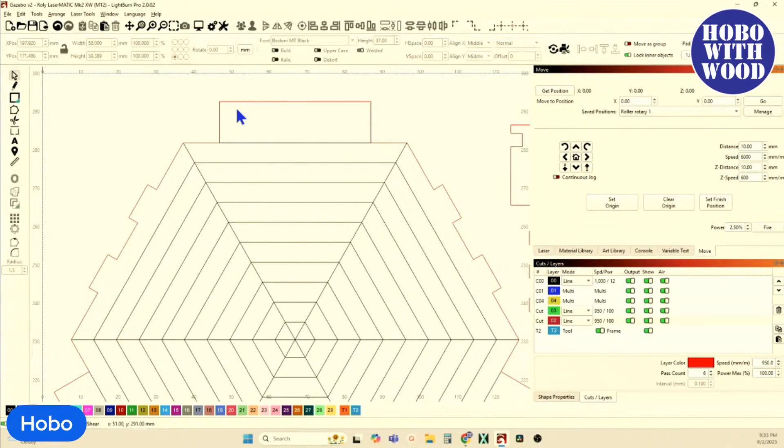So here is the floor, and the original design was come around here, and it had the same tabs on it that popped out right here. And that's what you see at the top of the stairs right now, these tabs. Well, these tabs, I removed them and just extended the floor on out, and that will actually be the top step on the staircase. And I modified the stairs so that now I've still got 3 treads here, but there's only going to be 2 — one that snaps in here and one that snaps in here. And this will be the first step up.

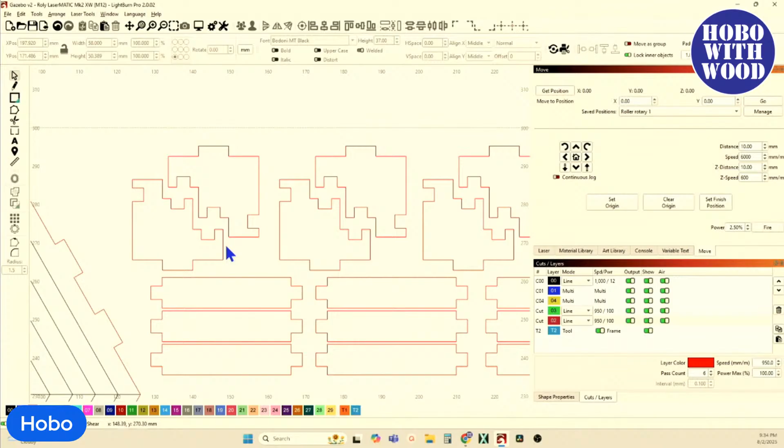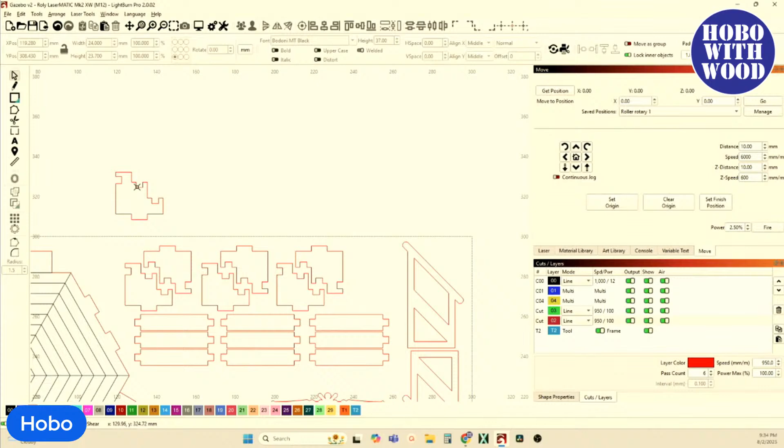In fact, let's pull this out so you can see it a little bit better. That'll be the first step up here, second step up here. And then this is where the floor of the gazebo comes out. And this one is where that third tread will go back here, and it'll be behind and underneath the floor.

And the sole reason for this piece is to help you square everything up. When you pop these 2 treads in and you pop this one in, then you're going to start to have everything squared up. Without this on the back, even when I had the 3 here and here, the whole thing could still get cattywampus. You couldn't square it up. And when you were trying to manage that one piece and get it lined up, get it into the tabs on the bottom and into the slots on the gazebo...

I mean, I did it because there it is. Anybody who's got the first file and tries to do it might say, oh man, I can't do this. It can be a little bit challenging, but it's doable. And I did it. It works, or else I wouldn't have put it on the website.

But by me doing it this new way, you can actually build the steps, and there will be a complete separate module that will be squared up. And then whenever you've got them squared up, this back tread right here, you can put a little bit of glue on the back of it and then put your glue on here. These will just snap straight down and push that against the base of the gazebo.

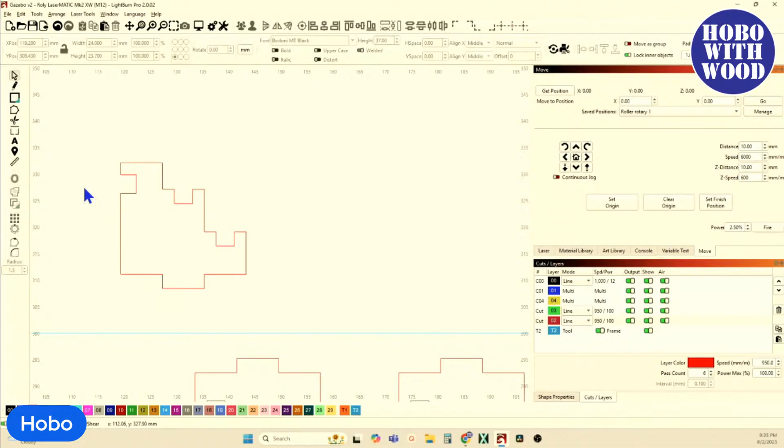And there's no holding your mouth right and dancing and hopping around and spitting in the wind on a blue moon to get these things lined up right, because that's what I had to do. It was challenging, but I got it. But that will clean all of this up, make these easier to assemble and install.

And I think that's going to make a huge improvement. Kathy says, I am thinking this would be neat for a wedding table. Ooh, for the bride and groom statues inside. Now, I could see that would work.

And you could even customize it, personalize it, monogram it instead of just having a clock up there. It could be the wedding day, the initial, maybe every other one is the last initial, and then every other one is the anniversary date, the wedding day — that way it'd be something special, but not everybody's going to like that. There'll be a handful of people that will love it, and then there'll be some that'll be like, yeah, that's just too country for me, honey. They'd be too sophisticated. But I like it.

So there are two 300 by 300 tool paths, and I've got everything nested on two sheets.

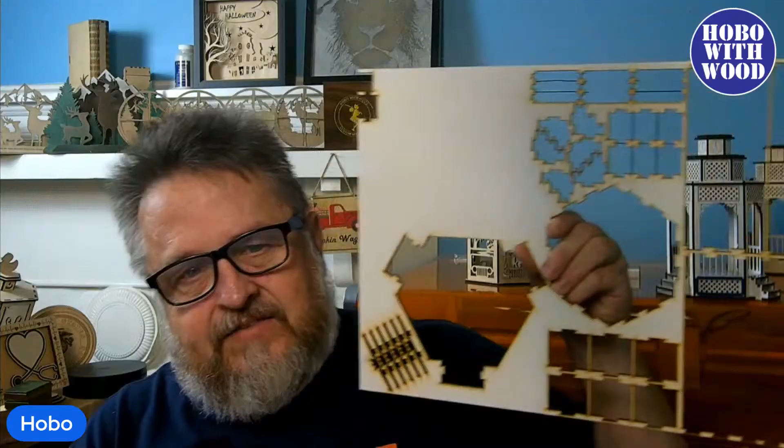Now if you were going to do it like I did - I used the 3 mil MDF, and it's 12 by 19, give or take. And there's the waste from it. Then I had, I don't know where the blue's at, but another 12 by 19 that I did the roof line with. It's here somewhere, don't know. So you can do it from a single sheet of 12 by 19.

And then if you want to do the colored roof, a partial sheet of that. But if you didn't want to use MDF and you wanted to use 300 millimeter material, you can do it on two sheets of 300 by 300.

Brad says, what is your assembly time? I know mine will be much higher than most anyway. The assembly time, or the cutting and assembly time?

I spent more time cleaning - and I say this cleaned up, you can see the black or the soot around right there, see how dark and sooty that is? But it wipes right off, and it's clean as can be. I spent more time cleaning the material as part of the assembly process - more time cleaning than I did actually gluing stuff together. And I did not get upset about that because it was just wiping it off.

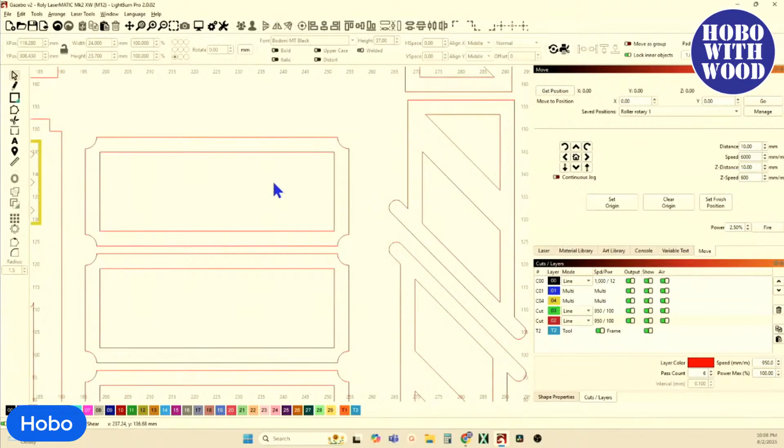Will you have room for two sheets after you add the accents? I've got the accents, everything's on there on two sheets. This is everything—it's got the roof accents right there, the accents for the bottom around the base, and the handrails. Everything is on here on 2 sheets of 300 by 300. So for less than $6 in material, you can put this together. But I started with the actual base and put 3 of the 6 sides on there.

Why don't you cut out the small pieces to save on the wood? I don't follow you there. Are you saying why don't I use scraps, some of my scrap material, to cut out the small pieces? You could, if that's what you're talking about. From a time savings standpoint, he's talking about the skeletons—the scraps. That's what I thought. So yeah, you could definitely use your skeletons.

Because I've got skeletons laying everywhere that I could easily cut out some of the trim pieces from. And over beside my laser, I keep really nice skeletons that have got some really good meat on them. In fact, this is a skeleton—you can see this is a skeleton from cutting out the first prototype that didn't work. But there is some really good meat on my skeleton that I could use to cut out the small pieces.

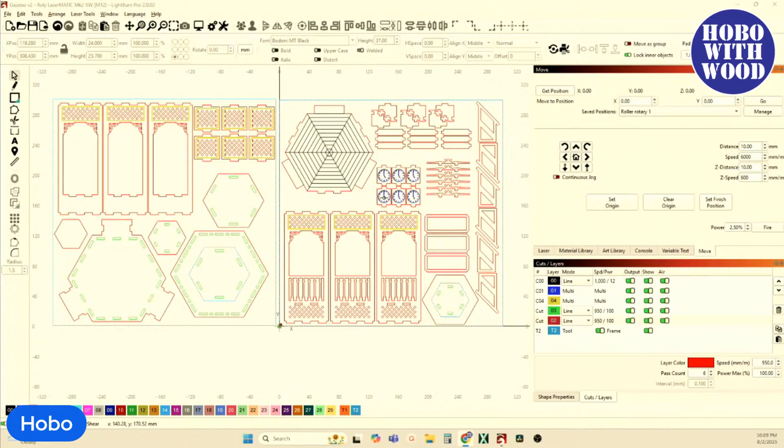The only problem with doing it that way, and it's not really a problem, is that the reason I have it nested on 2 pieces of 300 by 300 material is because when people buy my file—or even if they don't buy it and they're a patron who downloads it—having it nested very neatly on just 2 or 3 solid sheets of material, they prefer to see that. If you want to do your own and grab these off and put them on scrap pieces, you could do that. The one thing I'll caution you about is how many different variables in thickness you'll have cutting them out of 3, 4, or 5 pieces of scrap material versus putting down 2 sheets.

The door opening cutouts—yes, some of the small pieces could go there too. You're absolutely right. I think he's talking about using the small cutout spaces, yes. But I didn't need it. If I needed more room, you're absolutely right, that would work.

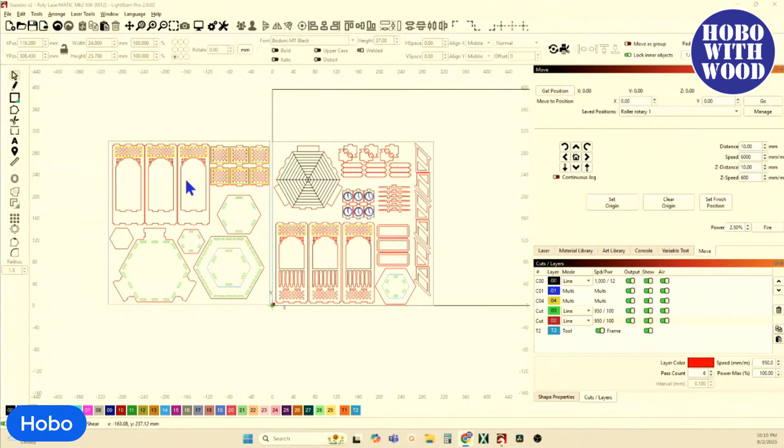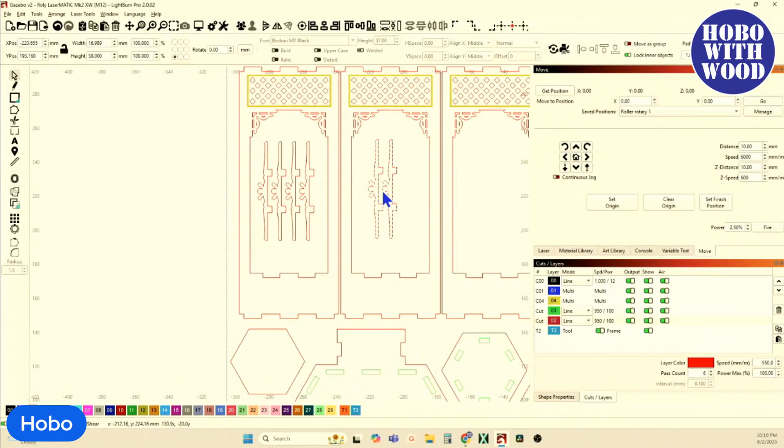I finally got it all put together, and Terry got it too. Right here is waste, this is waste, and this is waste. So if I needed the room, if this was too crowded, I could grab—I don't know if I get 3 of them, or they're grouped—let's just say duplicate that, bring it over here, rotate it, ungroup them. And since that's waste material, I could put them right there. And the stairs I could put in there. You absolutely could, there's nothing wrong with doing that. That would also keep you using the same thickness of material, so you won't have a problem with variances on slots and tabs. But I didn't need to—everything fit on 2 or 3 sheets without having to put pieces within pieces. Still, nothing wrong with doing that. Very smart to do that.

All right, I forget what we were talking about. That was another thing I was really pleasantly surprised by—the premium Baltic birch that I use a lot of, and will continue to. It varies in size anywhere from 2.7, sometimes 2.6 millimeters, up to 3.3 millimeters, so you can have a pretty wide variation in material thickness. But that craft closet stuff was 3 millimeter, period. The blue is 3 millimeter, period, flat as you could ask for. Man, I was really impressed with it.

I was talking about the assembly process. I started with the base. I put 3 vertical sides up, and then I pushed the floor into the 3 sides that I had in the base.

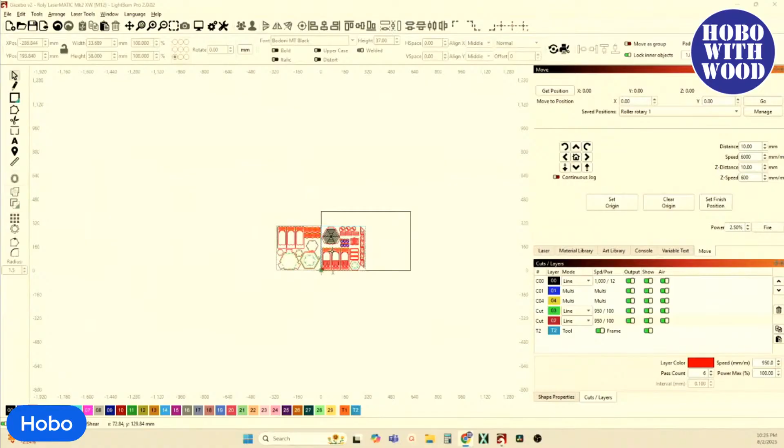And what he's talking about, if anybody's not aware of it - if I come over here, let's grab one of these that's individual, that's individual, that's okay, we'll just duplicate it and bring that over here, and we'll ungroup it so you can see, make sure those are grouped.

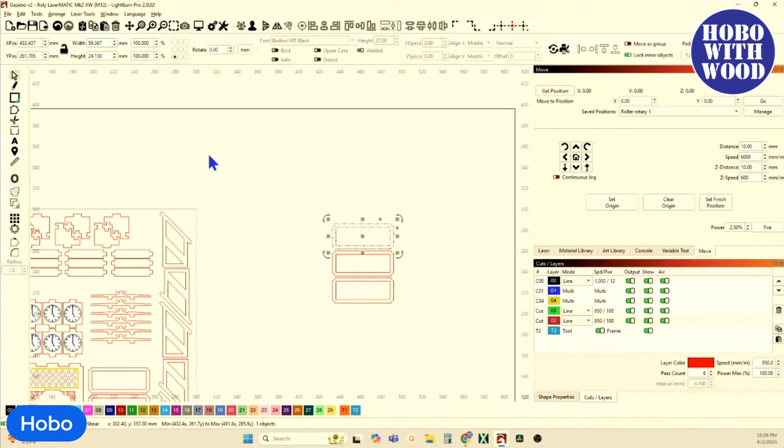So right now I'm zooming in and out with my center scroll wheel. But if I come up here and just put it right there, I've clicked on my width, and now if I scroll... well, there, it's not doing it. But if you are there...

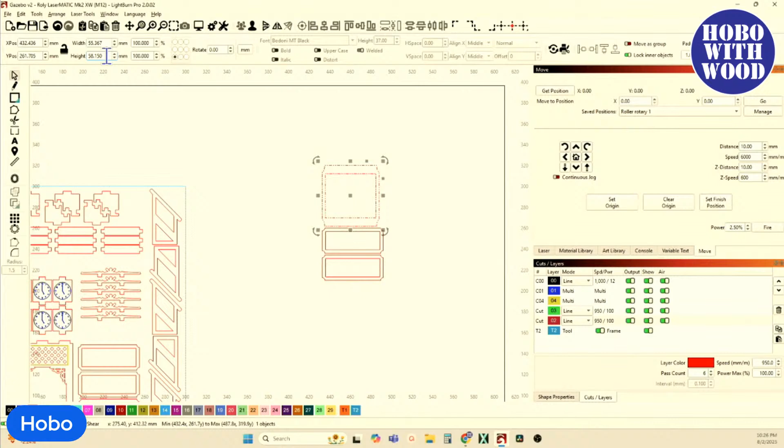There, it's not doing it. But if you're hovering over it, there we go. And you scroll, you can change your width by scrolling in and out. I've actually had it, and they may have fixed it so that you have to be hovering over it for the scroll wheel to work, because I've had occasion where I'd be scrolling in and out and the size would change. So that might be an amendment they made.

What do you know about that, Terry? Or not Terry, Chris, if you're still here? I've occasionally used the scroll button and inadvertently changed the size of a shape, but I never noticed I had to be in the field when I did it. Yep, Control Shift, Control Alt Shift, really tiny movements. Oh my goodness.

Scrolling was fixed due to the amount of accidental resizing. So yeah, they did change that, because I used to scroll all the time and it would go crazy. I don't know if that's exactly what you were talking about, Jim, that it works differently now, but that was a good fix, a good change.

Well, God bless you, sir. Thank you, Jim. All right, I got a little more work to do. It's been 90 minutes. Alright, Kilroy, you're asking — okay, Kilroy's asking, I didn't realize you were talking to me. Can you use... and there we go, that's why I didn't see it. That's a question. Kilroy, remember, anytime you've got questions addressing me, put question marks in front of it. I'm not selling, that's a whole other ball of wax, I'll talk to you about that in a second. I didn't realize that was a question.

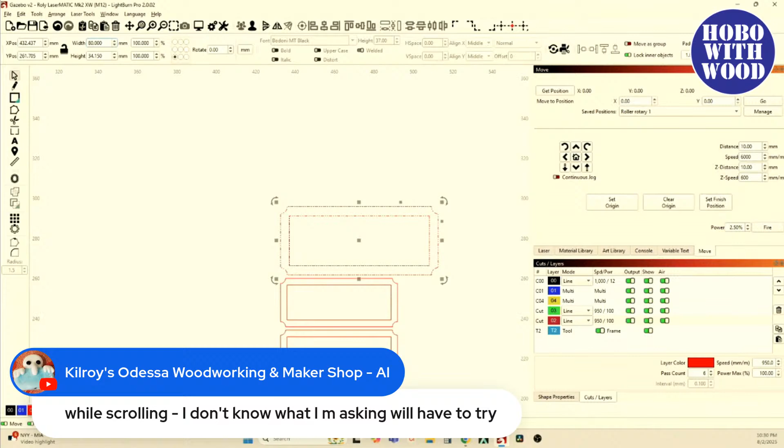And if I'm hovering over that and using just my scroll button — let me turn off your comment so we don't... where is it at? Kilroy, while scrolling — oh there it is, all right, turn it off. So I'm at 80 mil, hovering over that field, and I use the scroll button. I scroll up, it goes to 81, 82, 83. It's moving in 1 millimeter increments.

If I hold Shift, it's still 1 millimeter increments — Shift doesn't do anything. I'm now back to 80. Now I hit Control and the scroll button, it moves in 10 millimeter increments. Now I'm at 40. If I hit Alt, it doesn't do anything — Alt stops it from scrolling at all. Control Shift still does 10. Alt Shift doesn't do anything. Control Alt Shift doesn't do anything. So the only buttons doing anything are just Control, which makes it 10 millimeters, and Shift does nothing.

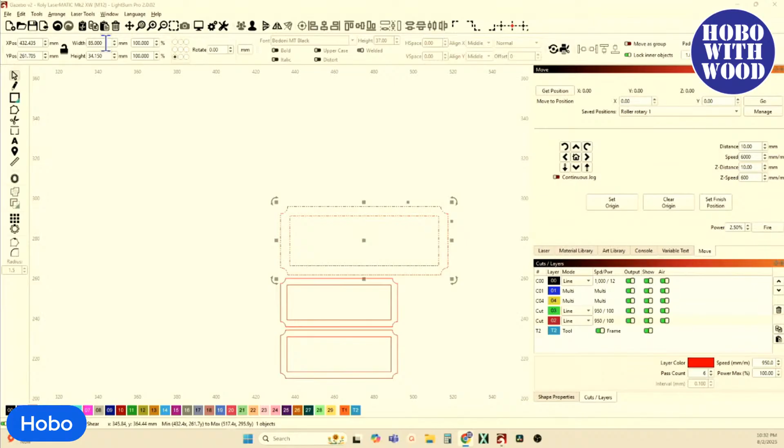And really, so Shift doesn't do anything either. So scrolling doing nothing gives you 1 millimeter increments, holding Control gives you 10 millimeters. And I just broke it. So that's what you were thinking about.

Roy's asking, am I still selling anything to John? He went through a little bit of an issue — he shared it, and it's not my place to share it, but he went through some problems with his online store after his wife passed away. Things got really rough, so I haven't done anything with him in a while. I think he's got most of that straightened out, but it was a mess. His wife passed away, and there was a lot of drama that went along with that. I think he's got a lot of that straightened out, but I haven't done any business with him lately. He's doing a lot of traveling — he's doing what I wish I was doing. He's living a hobo lifestyle right now. I think he's in Tennessee right now, but he's somewhere new practically every week — concerts here, appearances there. So he's living the life I wished I was living. Hence the name Hobo.

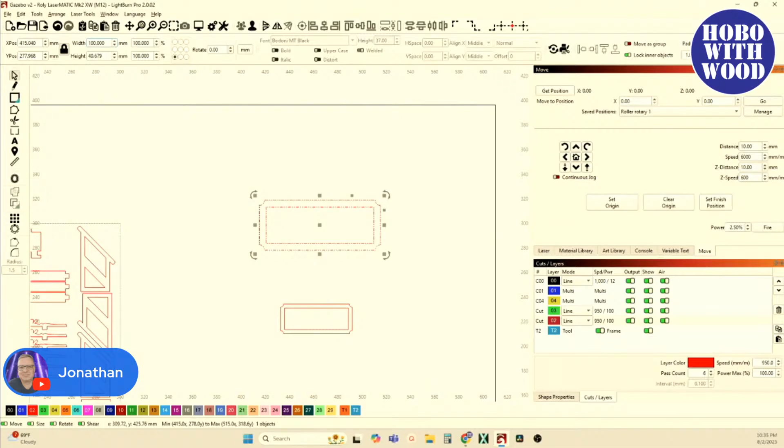John says he noticed that the scrolling trick bypasses the lock. So the lock is on, and when I scroll there, it's moving correctly. It's still locked. If I hold Shift, it's still locked. If I hold Control, it's still locked. I don't quite follow what you noticed there, Jonathan. Give me some more information, share with us what you figured out.

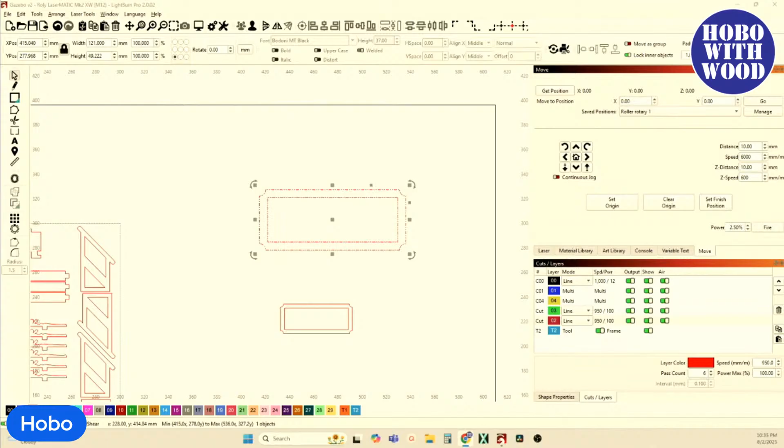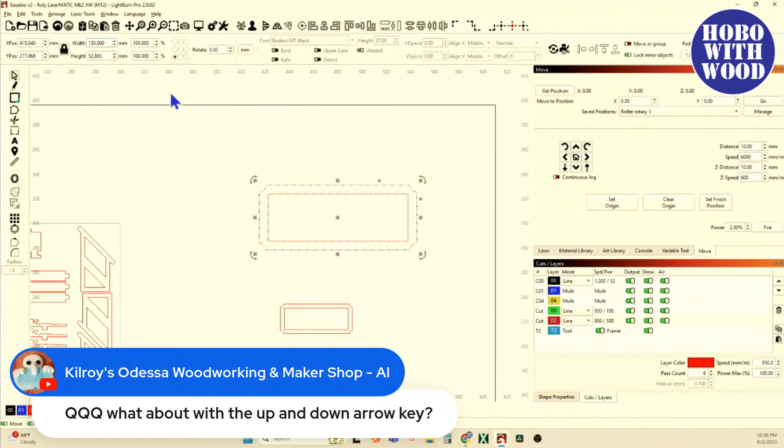What about the up and down arrow key? Up is 1 millimeter, Control is 10 millimeter. Looky there. So if you are, I'm back to 130 and I'm using my up and down arrow keys. Up 1 millimeter, down 1 millimeter, hold the control button, up 10 millimeters. So yeah, control will move your decimal point over apparently when you're moving your width and height. Windows is stealing priority on some, but not all keys.

Russ said he emailed me information on the MDF. Okay, good. I am an MDF fan, I found that there are different kinds. Must be due to the amount of glue and binder, that was my contention, Jim. The high density MDF is hard to cut, chars like wildfire, terrible. Lower density doesn't warp and it cuts well.

So yeah, I had no idea there were variables in MDF like that. That's why I mentioned the stuff you get in big box stores, it's probably that higher density stuff, full of lots and lots of glue, super hard to cut, I just didn't like it. But this stuff cut like butter, super impressive, nice clean cuts, full drops, really good stuff. So I apologize to everyone I ever offended by saying I don't use MDF. I prefer to use solid woods and hardwoods, the premium Baltic birch is okay, but I prefer hardwoods. Yeah, the MDF is good if you got good stuff, and I really am impressed with this stuff.

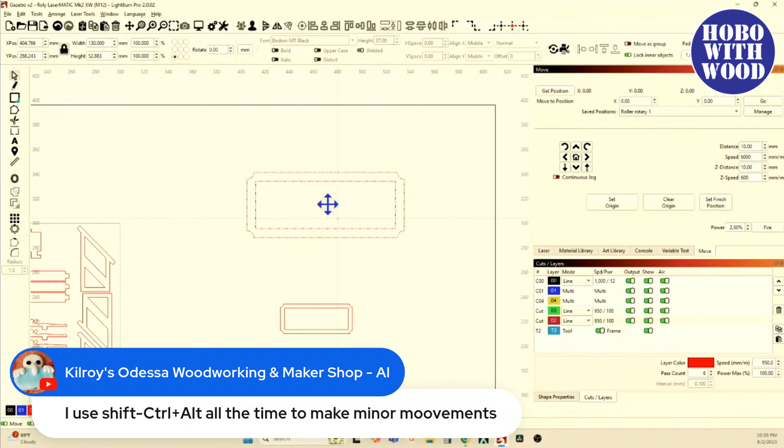Kilroy says he used shift alt control and got minor movements. So let me go back over there, I tried it, I've got that selected, aspect ratio is locked, alt shift control, and the scroll doesn't do anything. Now I'll use shift to get really, really fine movements with the arrow keys. All right, so control alt shift - are you talking about up here? Okay, I don't know that that's doing anything actually, other than, in fact, let's look at something. I'm curious, now you got me wondering.

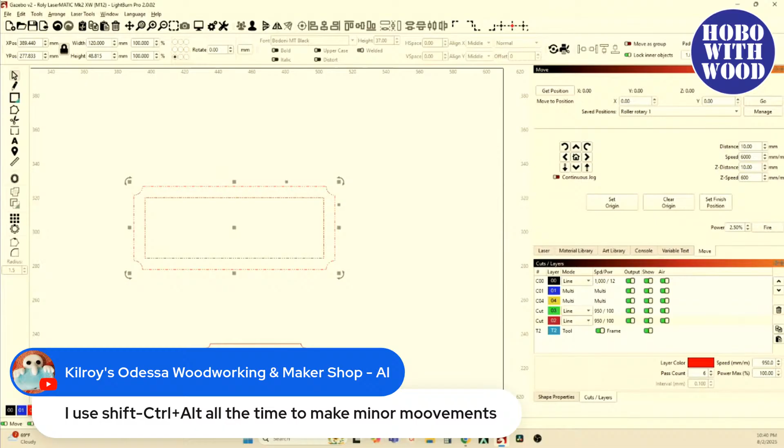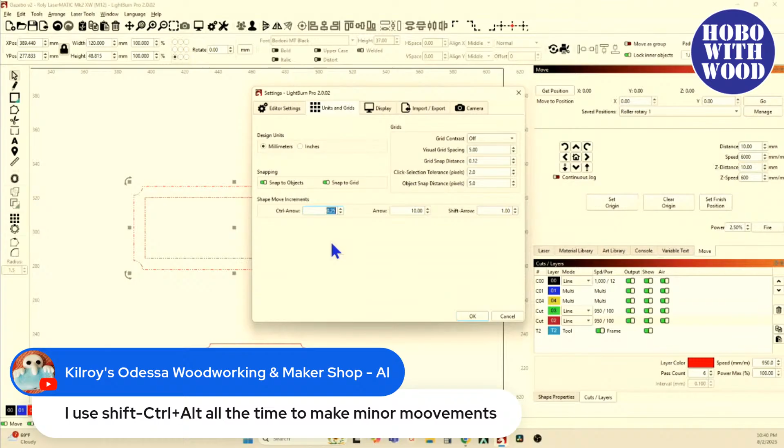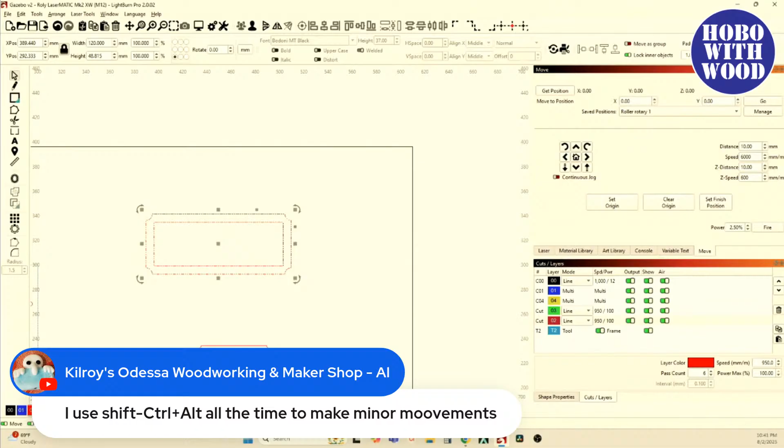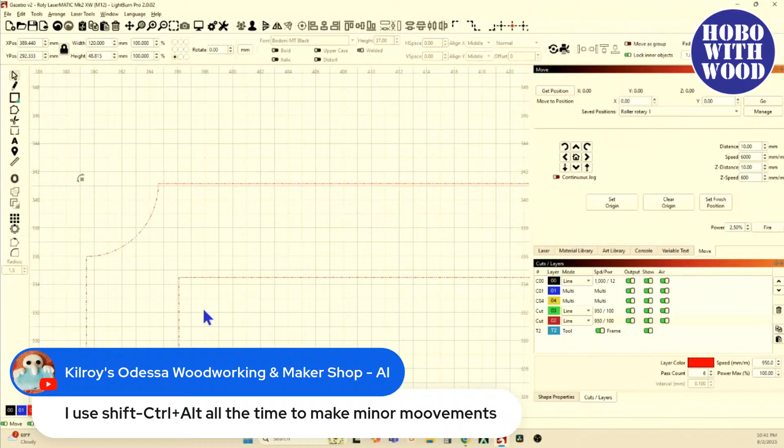In your settings, in your units and grids, you can set up your movements. I've got right now 10 millimeter, 1 millimeter, and this is a quarter millimeter. But you know what, I'm going to do something crazy here, I'm going to tell this to be 25 millimeters. So now if I hold shift and arrow up, that moved whatever that was supposed to be, 1 millimeter. Just holding nothing, that's 10, there's 1, and if I hold control, that'll be 25. So what happens if I do alt shift control? I don't know what that movement was, but we can find out. We're going to turn our grid on, high contrast, and we'll do visual grid spacing of 1 millimeter and say okay. All right, and we're going to, actually, we'll just do a simple square, we'll come over here.

And I'm going to put that right there. Come on.

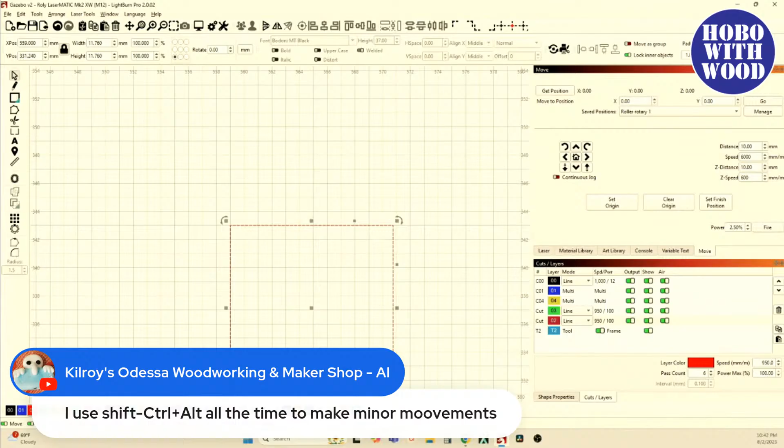All right, so now that's 1 millimeter, that grid. And if I move it with nothing on, not doing any control, no nothing, just my arrow, move it up. There we go. And that is set to 10 millimeters.

Shift arrow should move 1 millimeter. So hold shift, and that jumped up 1 millimeter. Hold control, and it's going to jump way up out of screen. So jump 25 millimeters. But alt shift control, that moved a different variable, a different amount. That moved.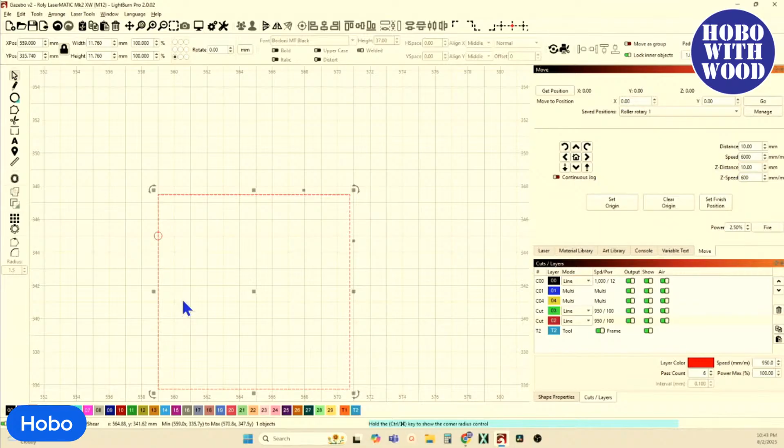In fact, let's mark my original. So now if I move alt shift control and move up, that moved 2.5 millimeters. So it moved in a different, that's a value that I didn't even see you could set.

You can set shift, you can set, let's go back and look at that again. Yeah, you can set the arrow movement, the shift arrow movement, and the control arrow movement. But there's nowhere to set the control alt shift movement. And it looks like it has a default of 2.5 millimeters. But I set my control arrow to either a half mil or a quarter mil, so my control arrow movement is a whole lot smaller than your control alt shift movement.

Never mind, I cannot recreate, but I thought, okay.

Yeah, that stuff, they promote this for laser users. It was some of the first that I got, and it wasn't just pre-finished, but it has patterns on it. And no laser I had would even dent it. It just looked at my lasers and laughed. And I'm going, yeah, I ain't using that stuff. That was one of the first things that turned me off.

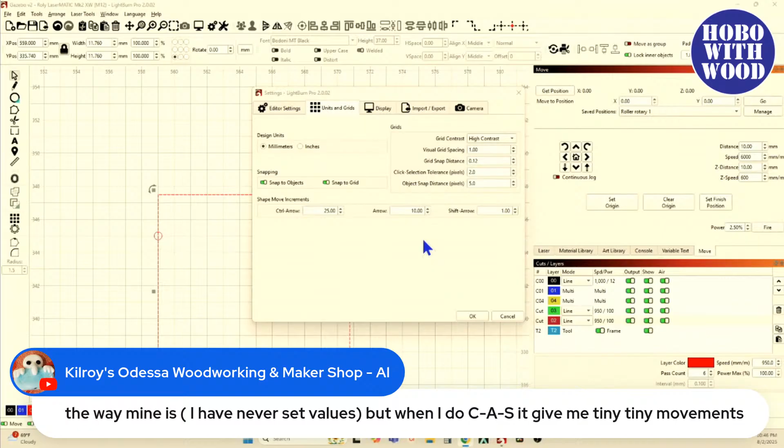So don't know. Don't know. Don't know. Would it be a quarter of the one you had set for 10 mil? No, 25% of 10 would be, well, yeah, is that, let's look.

Ooh, all right, let's do that, that moved 2.5 mil. So let's set it at 5 mil for my arrow and say okay. And then let's see. Put this back to the original spot. Come on, dummy.

Okay, so his thought process was, does Control Alt Shift give you 25% of the movement of what you had as just the arrow movement? So let's look. I moved the arrow movement to 5 mil. And now if I do Control Alt Shift, if his math works out, then that's going to move 1.25 mil.

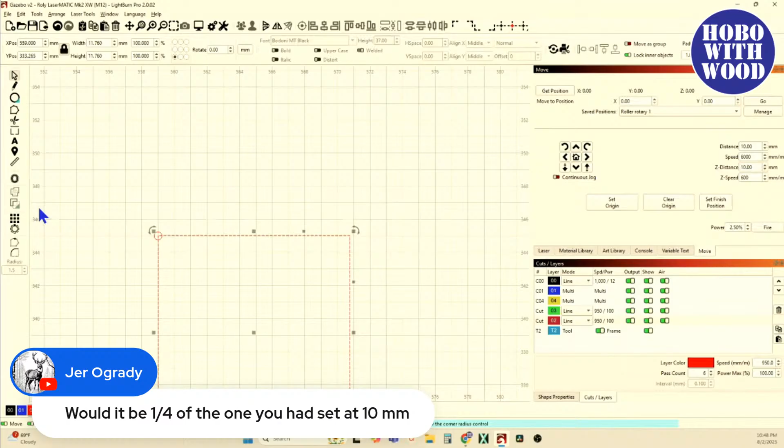So just for giggles, that moves 5: 1, 2, 3, 4, 5. Shift moves 1. Control, I set it to a quarter, so there's a quarter. And a Control Alt Shift. Yes, sir, yes, sir, look at there. That's it, Jer figured it out. Jer did the math. Jer is on the money. So that moved it, that moved it.

Well, actually, what is that? Let's see, 5 times. Not 5, dummy. No.

Yeah, I was thinking it was 1.25, but it didn't move it. No, that math don't math. I told you my math don't math sometimes, but he's right that it is a percentage somehow of that. What do we got here?

No, I suspect it's 10% of Shift arrow, according to LightBurn documentation. Hold Control when pressing the arrow key to nudge your selection 1/10 of a millimeter by default. This value is always 1/10 of the Control or Command nudge increment. So 1/10.

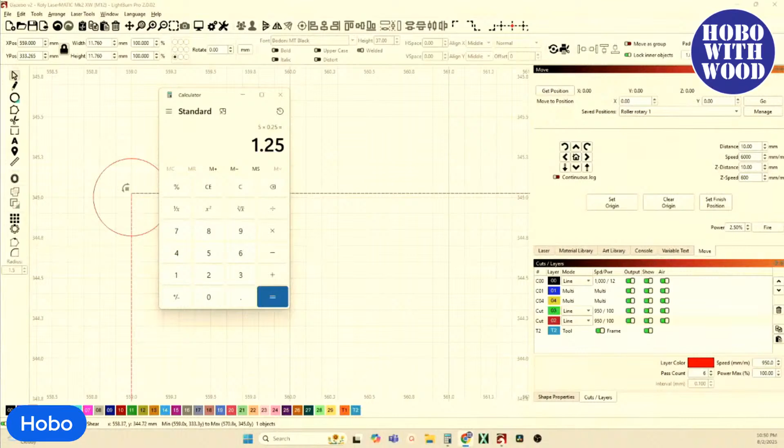Oh, now I got it. We got it. All right, so it's 1/10 of this, right? Well, let's just do it that way. We'll do this one at 100, this one at 10, and this one at 1.

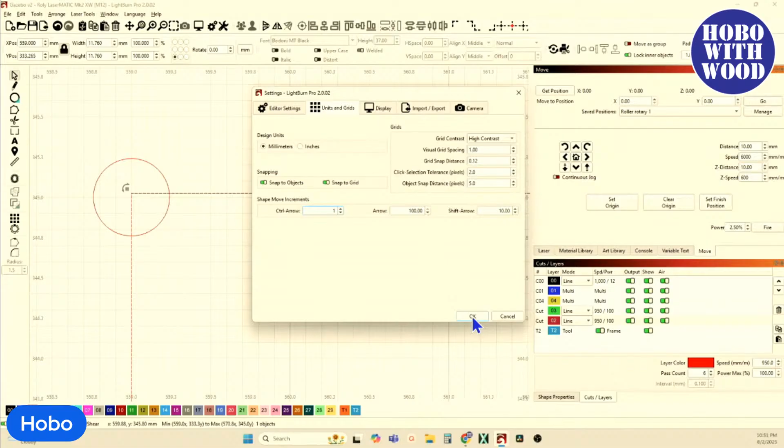So for people who are not very mathematically smart like me, we can see this really easy. If we put this back in the center and tell it to move 100 millimeters, it's going to go way out of screen. Come back, hold Shift, there it moved 10. Hold Control, and it's going to move 1.

Control-Alt-Shift will be a 1/10 of 1. So that moved a 1/10 of a millimeter. Looking at, yep. In fact, if you look right up here at your Y position, I'm at 0.34, 0.24, 34, 44. So 1/10 of 1 millimeter.

So 1/10 of the control. So Control-Alt-Shift will move 1/10 of the smallest increment you can set up in that Move tab. Check, I learned something.

All right. And 20 minutes ago, I was wrapping this up, but now we're learning stuff. The people who checked out of here thought we was wrapping up and didn't get some there. They're missing out.

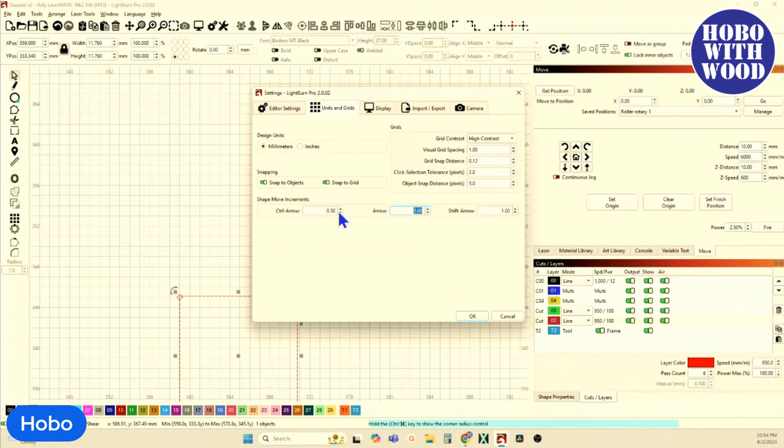And actually, I need to change that. I want mine usually at 5, 1 1/2. But whatever this is, like right now, I put that at 0.5 millimeter. If that's what control arrow is, 0.5 millimeter, then Control-Alt-Shift will be 1/10 of that amount. So every time you change that value, you change the value of how much that Control-Alt-Shift moves.

This is the way, this is the way we tie our shoes. This is the way I learned the hidden secrets of LightBurn, just by experimenting. I like even smaller because I zoom in all the way sometimes. Well, you can set that, because I think that movement's going to be super, super small.

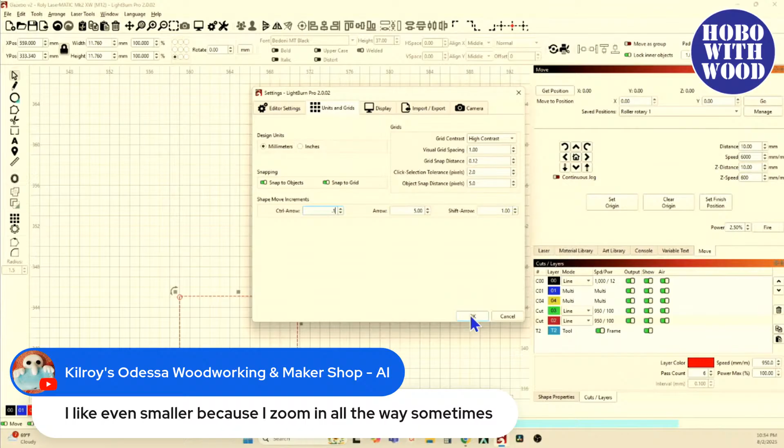If you go in and set that down to 0.1, 1/10 of a millimeter, then your movement would be 1/100th of a millimeter. Is that right? Yep. So at 1/10 of a millimeter, if I move this down to... come on, and we look up here, it's a 0.33324, and I do Control-Alt-Shift. Yeah, it's just moving 2.5, it's moving 1/100th of a millimeter.

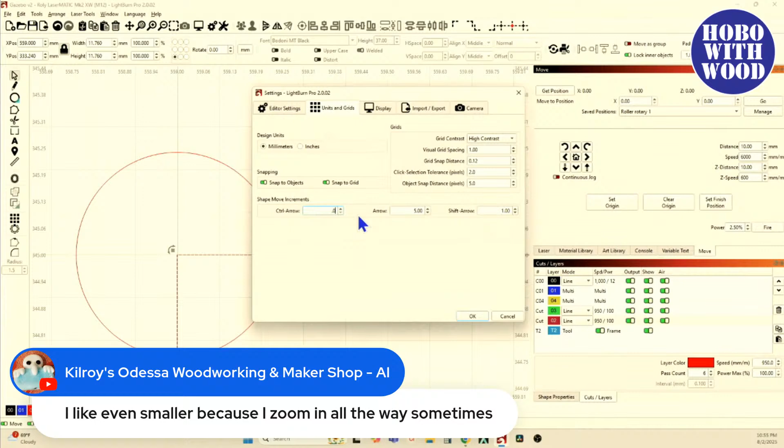If I want it even smaller, 0.001 — it won't let me do 0.001. 0.01 and say okay. 0.01, I'm starting out at 0.24. Control-Alt-Shift, and there we go. Now I'm moving 1/100th of a millimeter.

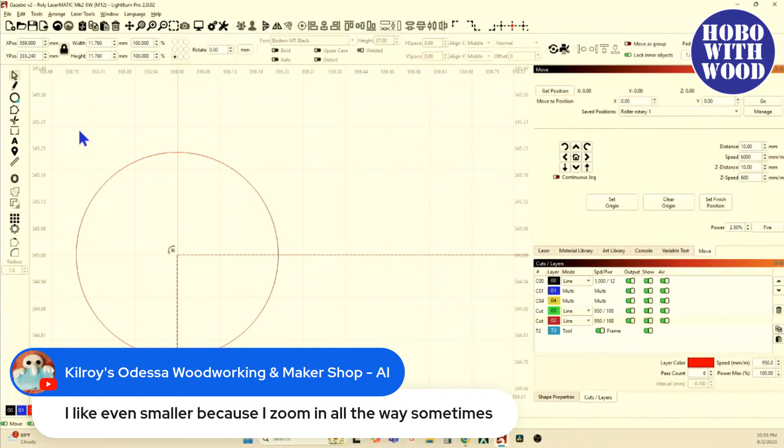I was really late getting in, so I'll have to find out about the MDF part by rewatching this. Yeah, we were just talking about how that's what this is. This is the first project I ever made out of MDF — the first successful project I ever made out of MDF, and we talked about that, Craft Closet. It's really, really good stuff.

And even he says with more than one developer, you cannot know all the flow and effects and updates. Yeah, there's so many hands involved in that pot, cooking that stew — you're adding this ingredient over here, and you got two more chefs over there adding these ingredients. It's impossible to know what everybody's doing. Impossible.

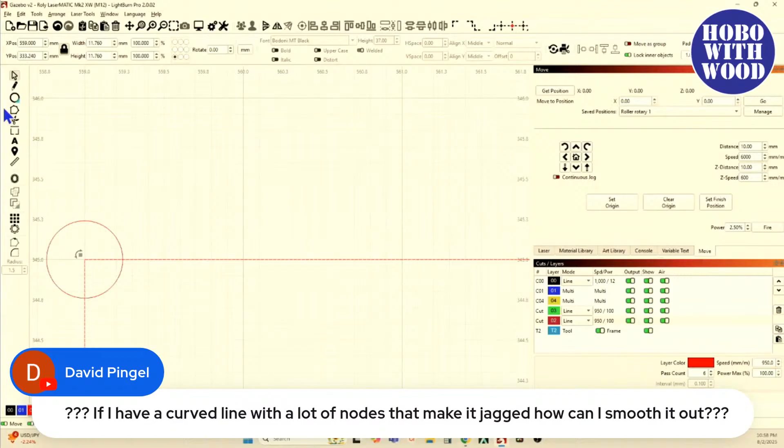It's stupid, yeah. But yes, go to the optimize shapes tool, David. I'm going to try and create something for you so you can see how it works. No, you don't want to go in and delete all the nodes because that can affect the shape of your arc. Instead, I'm going to try and create a curve. Then I'm going to go into node editing.

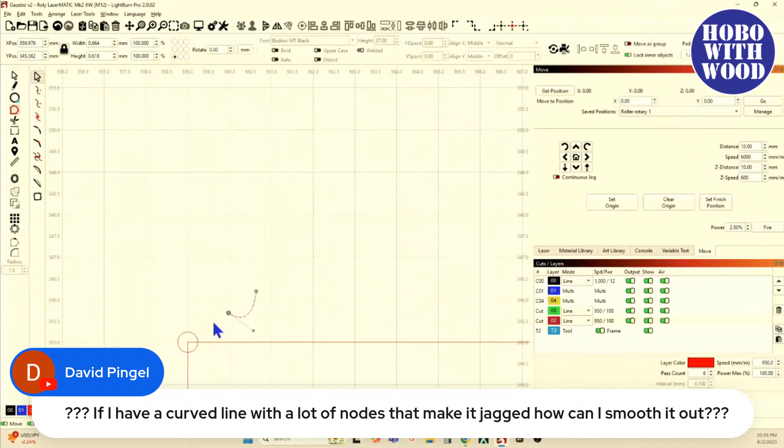Right now there are just 2 nodes between that curve, and I'm going to create what you're describing. I'm going to get rid of these right here. If this thing had a whole bunch of nodes in here, I'm going to insert, bring this one on around here, insert, and then come in here. In between them all, I'm going to tell them all to be lines.

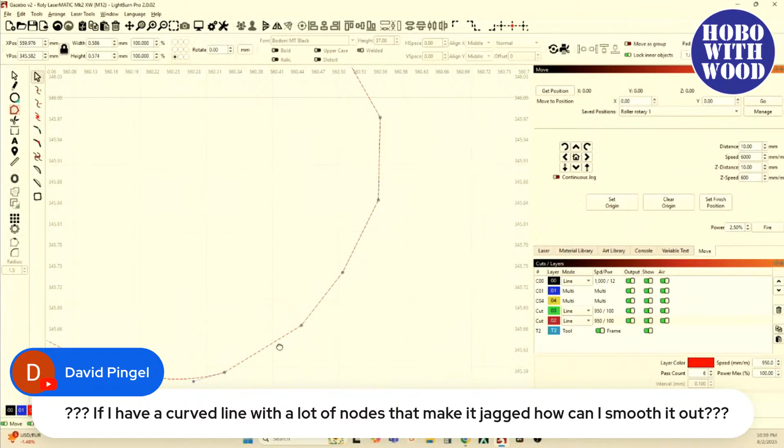Because sometimes this happens to you with designs you create and aren't aware what happened, but you get this arc that whenever you look at it, it's jagged. It's not smooth. And sometimes it's designs that you get from people that were created in other types of artwork. The way to make this smooth, just come up here to your tools.

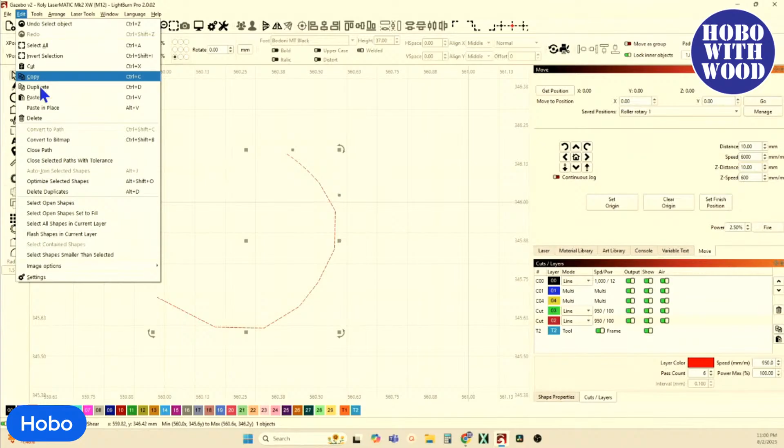There's tools to edit, optimize selected shapes. When you do that, it's going to show you all of the nodes that are in there. If you're wanting to make this truly an arc and you don't want any flat lines, because right now you've got 3 things you can do. This one is turned off by default. This one is fit shapes to lines.

If this is a curve, your goal is to get rid of lines. You don't want lines, you want to get arcs. So you can start increasing the number of arcs right here, and that deletes a bunch of the nodes right there.

But what I do, and I don't know if this is probably how it's supposed to be used, but this is how I use it: to maintain as much of that original shape as possible, I will turn on smooth source shapes and max that out. Once I've got that maxed out, it smoothed all that up, and it actually inserts a whole bunch of nodes. Then I'll come down here and increase this, and it'll begin to decrease the nodes so you don't have as many in there. And you can see right there, it...

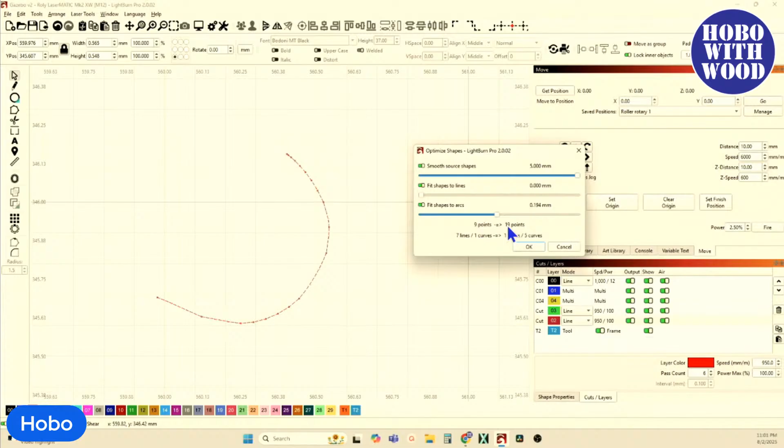Starts out at 28 lines, 0 curves. I want to fit it to arcs. Now it's got 5 curves, only 19 points. Let's get it down to 19, but that smooths it out and say okay. And that's better off. I've still got a little bit of a funky corner right there.

If that's not what I want, then I can go back into node editing and look at it and say, okay, what happens if I hit S? I just hit the letter S on that and smoothed that out, and that made it smooth.

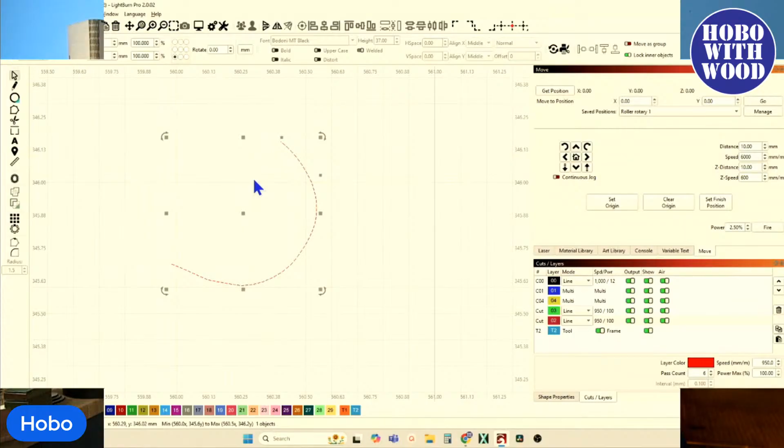But optimize shapes is one of the best ways to get rid of it when you've got a whole bunch of nodes and everything's squared off. You can use that to tell it to be curves and then use it to optimize it and get rid of as many nodes as possible.

I got more milk in the fridge, but I ain't going to get it.

How do I tell them to become lines? Hover between the nodes and hit the letter L.

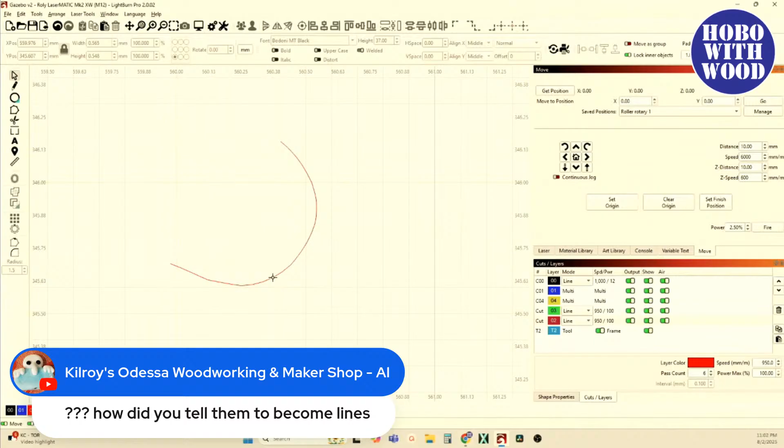This is new, go back in here to nodes. See, I've got this handle right here and this handle right here, and now I've got that funky curve going on. Well, if I don't want that...

They've got these new tools, or used to, in fact they probably still got it. If I go over here and just hover, just wait, there it is. If you just wait, your menu will pop up and tell you what your shortcuts are. There's S for smooth, L for line, smooth node or line, convert curve to a line, and it went away. So just come back and hover over it again.

Delete the node, insert a node, midpoint node, break, trim, extend, and align. And that's what these are over here. It's for people who, it's the same shortcuts, but it's a visual representation of what we just looked at.

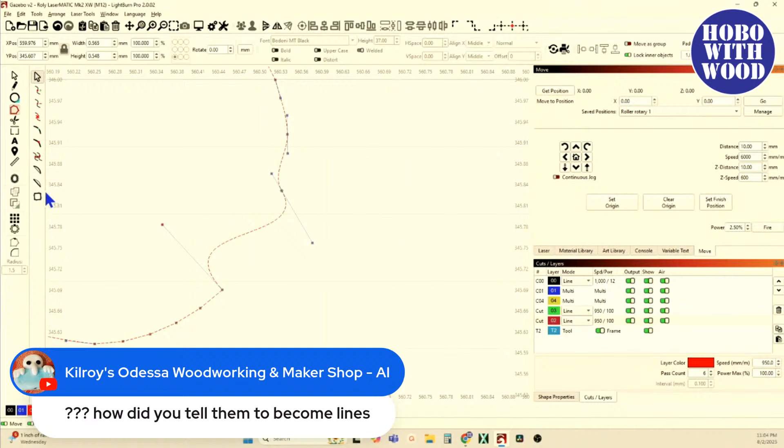So the one for L is convert a curve to a line, or press the L key. This one is smooth, that's the S key. If your eyes are not very good, you can't tell there's any difference in these, but there is. The darker one is the line, and this one, the darker one is the curve.

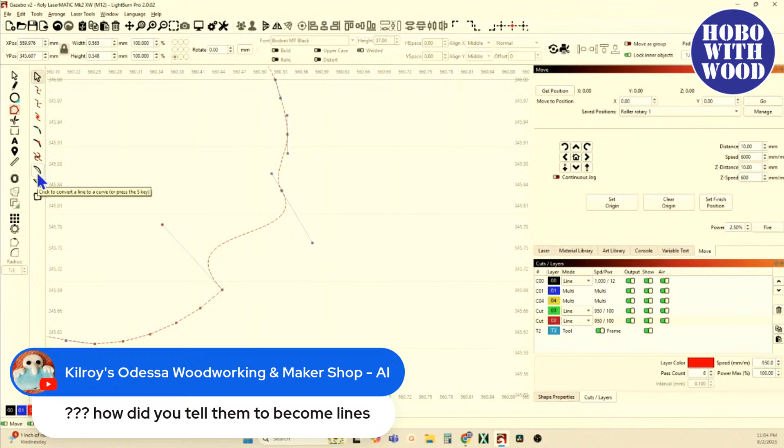This is one of the things they added in 2.0. It goes back to right brain, left brain, visual people, how you see and interpret things. This was a visual representation of what already existed. They didn't add or change anything, they just made it a new way for you to recognize what the tool does.

If I go back over there and click, I want to make it a line. I've selected that one, and then just come over here and click. It'll go to a line everywhere I click. But if I just come down here, don't do anything, hover over that and hit the letter S, it'll smooth it. It'll do this one right here. So if I come down here and click on it... there we go. Come on now, don't make a liar out of me. That's S. It's not doing S. Let's change. There's this right there, S. S doesn't seem to be working. Line, that's line. Smooth.

All right, there you go Chris. There's something to report, S doesn't seem to be working right there, unless I'm doing something wrong. Press the S key, click to convert line to a curve. And that's a line, and I'm clicking, and that should be converting that to a curve, and it's not doing it.

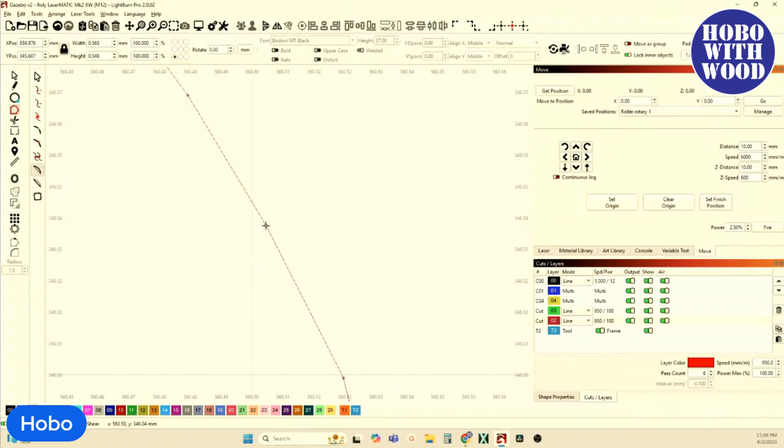Corner. I don't use these, I've always just used the keyboard shortcut. This will be S for smooth. And when I've got this highlighted, S, I should be able to click on this one and get two handles on either side of it. And I'm clicking all day long and it won't do anything. But I hit the letter S and I get my two handles to convert that and twist it. Come on, come on, give me the handle.

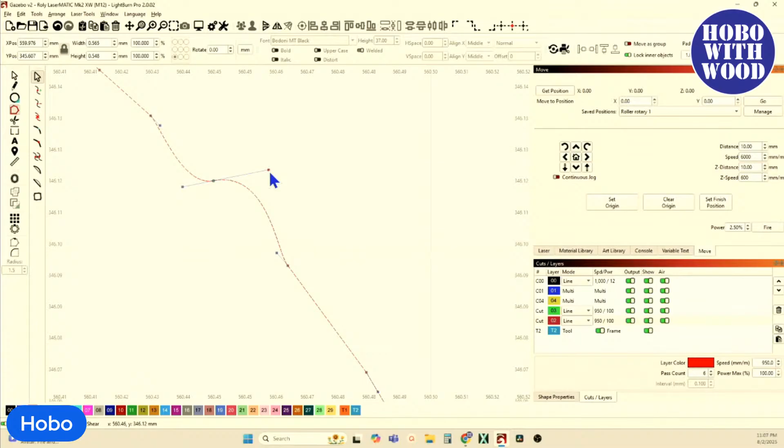Now it's not letting me grab the handle. Huh. Okay, you can't grab the handle whenever you're... yes, I don't like these. So that's S for smooth. And if I come up here to one that's not smooth, click on it, it should give me handles and it don't. But then if I hit the letter S, it gives me the handles, but I can't grab those because I have this selected. I have to go to my selector tool in the node editing in order to grab the handles. So I think this still needs some ironing.

I don't like this. I don't like this.

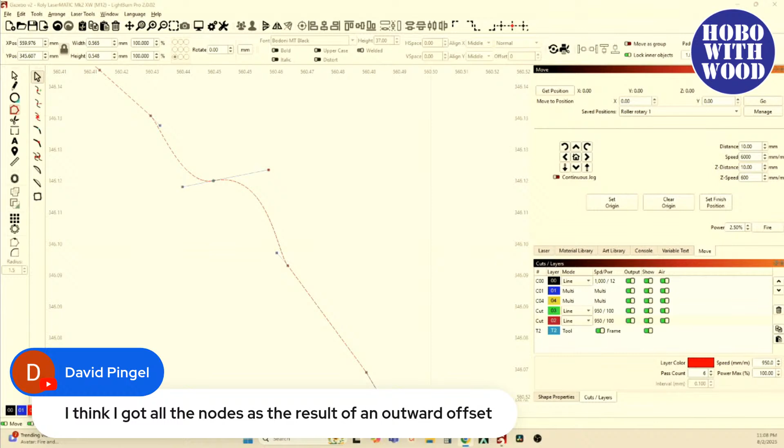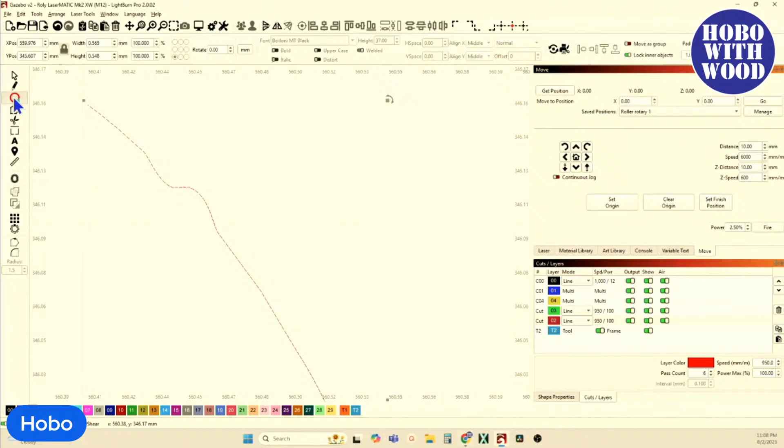Yeah, sometimes the offset tool can create some unwanted angular results, but if you look when you're using the offset tool, there's an optimize, simplify results option. I almost always have that turned on. If you don't have it turned on and you start doing some... there you go.

There's a circle that I did an inward offset on, and it's a 0 offset, but instead of giving me a circle, it's giving me a polygon shape of some sort because it's not simplified. That's kind of funky. That's outward.

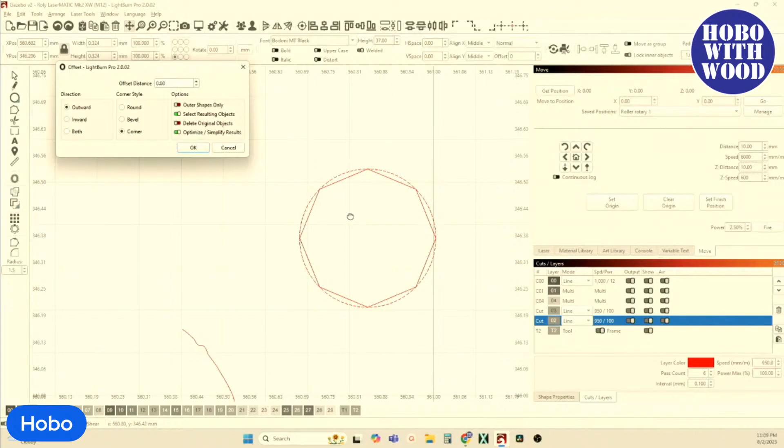Okay Chris, are you still with us? Or yeah, you are. That is a new problem. Let me try this again. Delete that, I'm going to draw. Let's see if I make it bigger, does it go away?

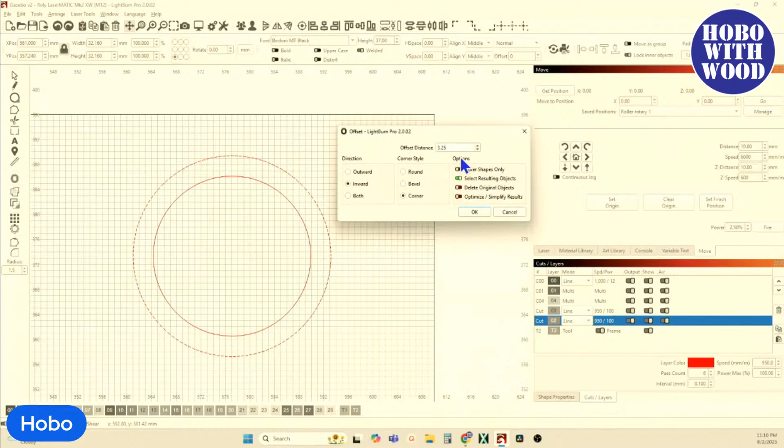So there's a 32 mil circle. Go to offset, if I go inward, optimize is turned off, I don't see those angles. Keep coming in. But to optimize, sometimes that's where if you don't have that turned on, that will create those angles. But I want to look at something, 0 offset. Okay, that worked, I guess it was because it was so small.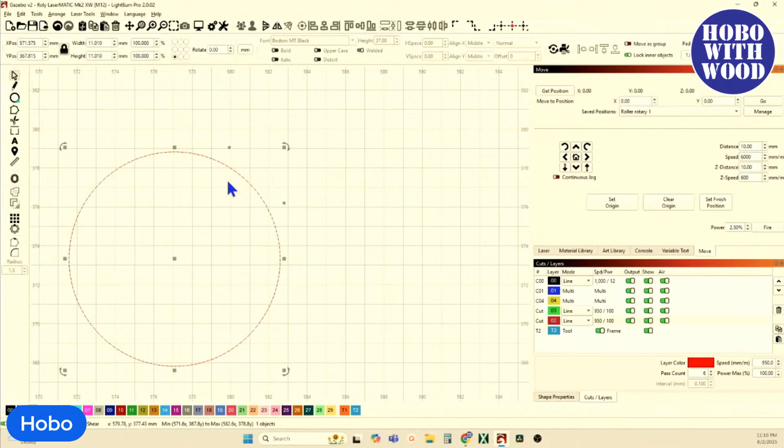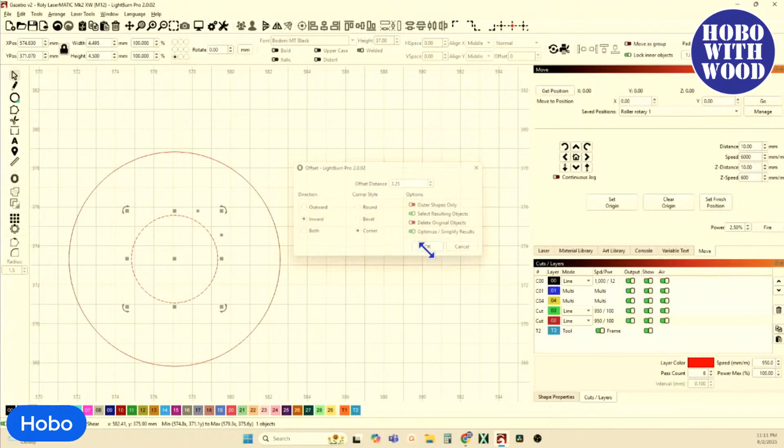Because I do 0 offsets all the time to correct problems and clean up. Another thing, when you have a bunch of nodes that you don't want, doing a 0 offset with optimize and simplify results turned on is just like using the optimized select or the optimized tool. But by doing a 0 offset, it maintains the exact same shape but cleans up all the nodes. Whenever I get something that somebody sends me and it's just got nodes all over the place, I use 0 offset all the time. So when that was doing something funky with 0 offset... let's see, come on, wrong way, Conway.

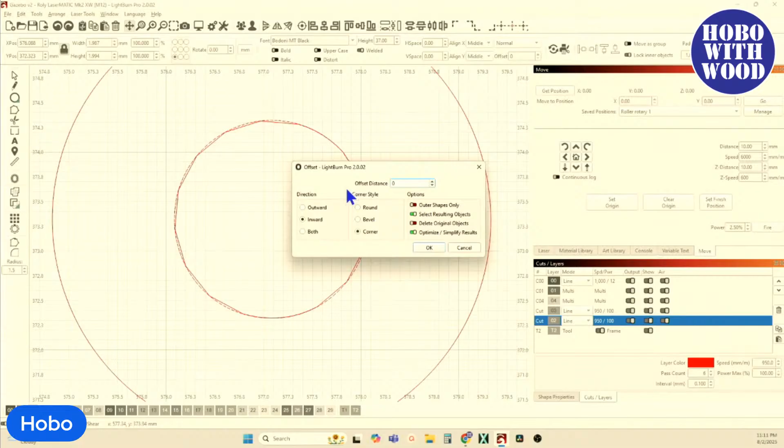I got optimize turned on, say okay. But when you say okay, it didn't work. Let's look at the node because I see some little corners there. Let's look at nodes. No, it don't either. Yeah, it's got some funky going on there.

Oh well. Ding dong ding dong. Why do those menus disappear just before you read down to what you're looking for?

Try it over the line, not the node. All right, let's try that. Here, get rid of that. Come back to, we'll use that one. Back to the same one. Come on. So, node editing. But now...

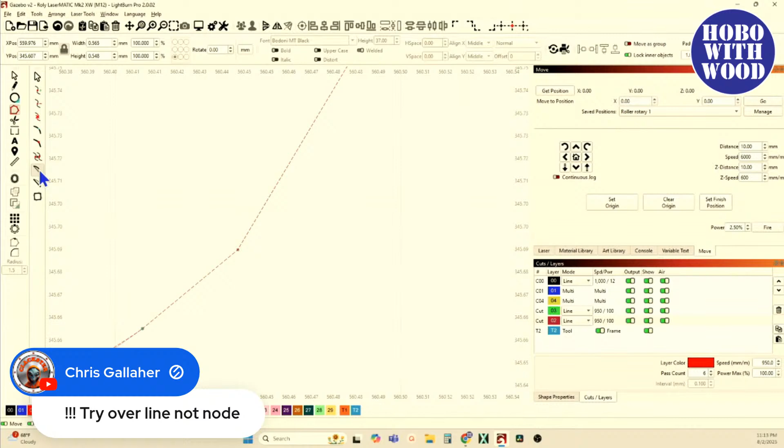If I go to line first and hover over that node right there and hit the L, or I click on the node, that don't do anything. If I click on the line, there we go. Go back to the curve and click on the line. There we go. All right. You still can't grab the handles though until you go back up here to the selector tool.

It's just a new way to do things. So there's a line, and you can tell it's a line because there's no handles on this node and only one handle on this node. So this is a straight line. If I hover over that line with the line or smooth tool and click on it, now I've got handles on both sides. All right, so that works. That works.

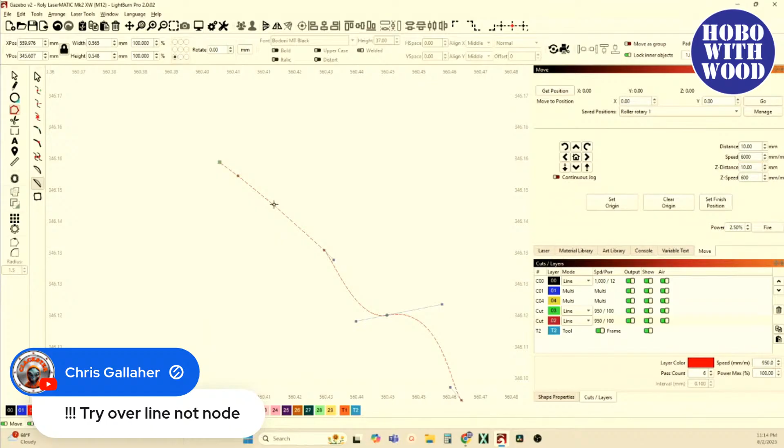Back to line, click on line, but click on smooth, turn it back to a smooth, hover over that. And that's because if you hover over it, there it is, that's a curve. If I come to that node right there and hover over the node, let's go back to the line button and hover over the node and click on it, it doesn't do anything. But if I hover over that node and hit the letter L, it turns it back to a line. So there's where I was getting confused because I've always hovered over the node and hit my L, S, whatever. But now you have to hover over the line in order to use that new menu. And so it doesn't mesh, you know.

Brad says you need to click the selector icon in the node. I did that. Yeah, you can use either or. But my problem was if you use the keyboard shortcut, you can do it while hovering over the node. But those new click things, you actually have to click on the line and not the node. It was to make it clearer which side of the nodes to operate on. Okay, all right. Like I said, it's just a new way. It's a new thing. Not a bad thing, just something new.

Not the way that I'm used to it working. I'm really proficient with node editing. I can do some serious stuff with my nodes, but that doesn't work the way that it's been flowing. That's okay, I'll figure it out.